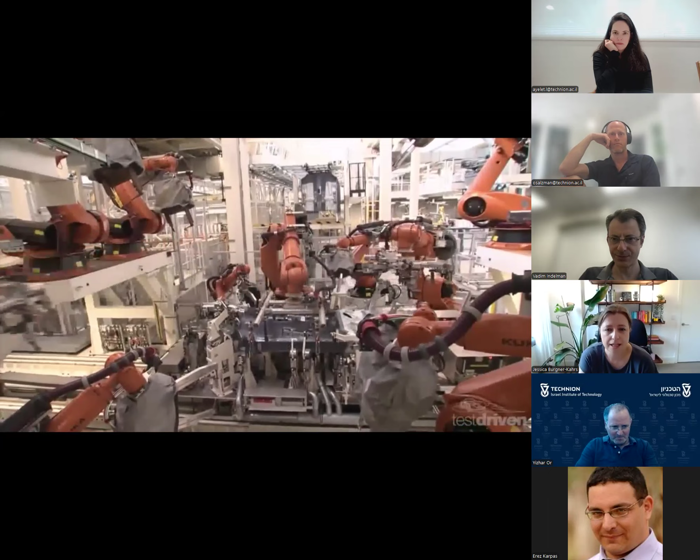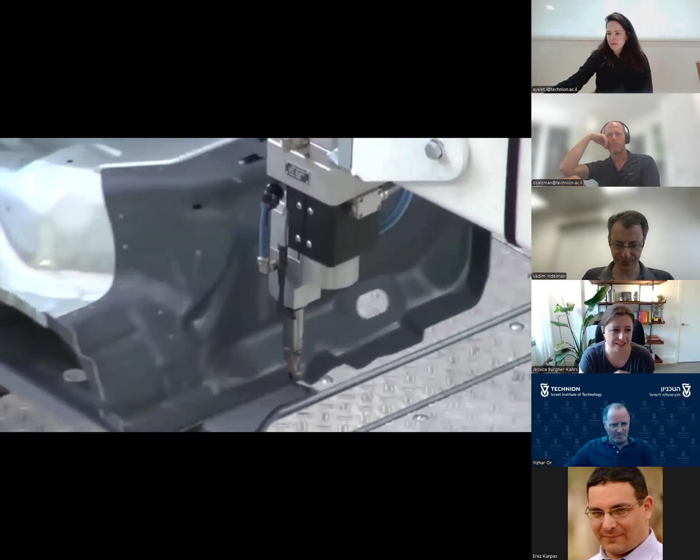Before we start with continuum robots, I want to talk about industrial robot arms, because these are really the workhorses of modern automation. They are positioning themselves with sub-millimeter accuracy. They are repeating thousands and thousands of cycles per hour without any fatigue. So they operate in these highly structured environments. Every bolt, every panel, every welding seam is exactly where it's expected to be. So I'd argue that motion planning and control are largely solved for these type of applications to date, because the world is mostly rigid, it's deterministic, and it's fully known.

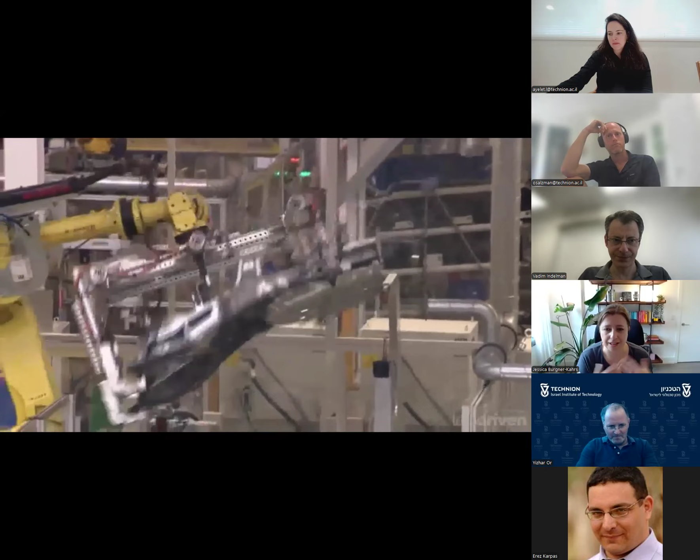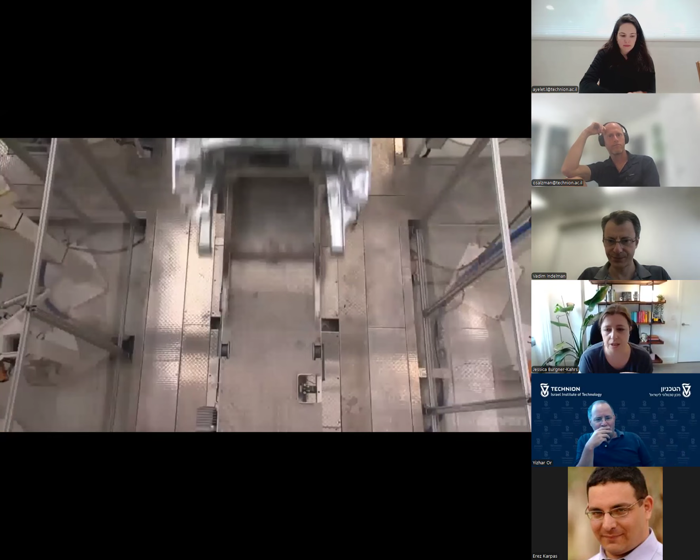At the same time, these robots are usually fully and heavily caged, so there's no uncertainty. Any deviation, any uncertainty, any contact with the unexpected would pretty much cause the whole system to halt. Now, in the past couple decades, we have also seen robots moving closer to humans. There is the counterpart of these traditional serial robot arms that are equipped with much more sensors, force torque sensors in every joint, and they have been termed collaborative robots, so they can do repetitive tasks closer to humans. And I guess nowadays we also see humanoid robots everywhere in tech demos, in news headlines, in investor decks.

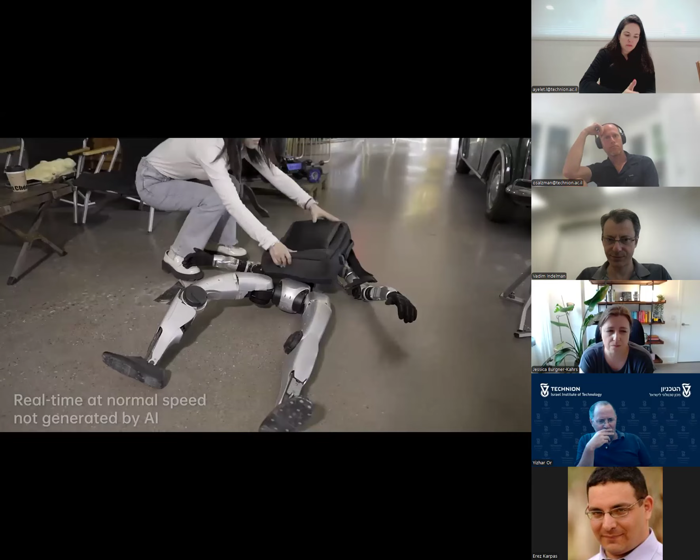There's true excitement and real money going into the idea of building this general purpose robot that can walk into a warehouse or factory, take over manual labor, or if we see these recent Tai Chi competitive motions of the Unitree, it's quite remarkable and an appealing vision to see these robots moving like humans.

A drop-in replacement for human workers is really appealing. They could use tools and spaces as they are with no redesign needed, as opposed to prior generations of industrial robots. But most of what we see today is still tightly scripted, carefully tuned, and far from robust in unconstrained environments. What is often missing is manipulation.

When you see these videos, there's no real true physical interaction with any cluttered, deformable, or delicate objects, which is where most robots struggle. Walking is hard, but touching the world with skill, like grasping, peeling, threading, assembling, is even harder. So despite the humanoid hype, we still don't have robots that can reliably do most of the things we see here.

They cannot operate in unstructured environments very well, and if they do, it needs extensive setup and tuning. These are everyday tasks we take for granted, like peeling an apple, threading a needle, flipping a pancake. Robots can weld cars, do backflips, do Tai Chi, but why can't they button a shirt or get a container from deep within a cupboard?

Each of these tasks requires subtle control of contact, friction, compliance. We require real-time feedback from both vision and touch. And it's not just about the grasping itself, but also about interacting with objects that are deformable, cluttered, fragile, partially occluded.

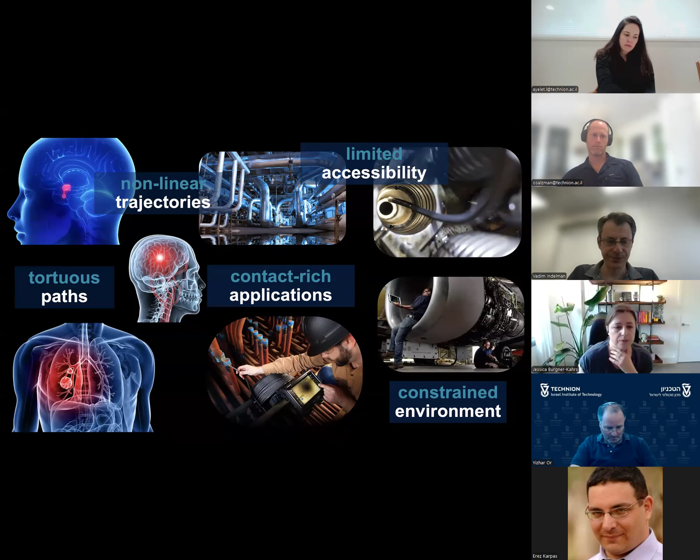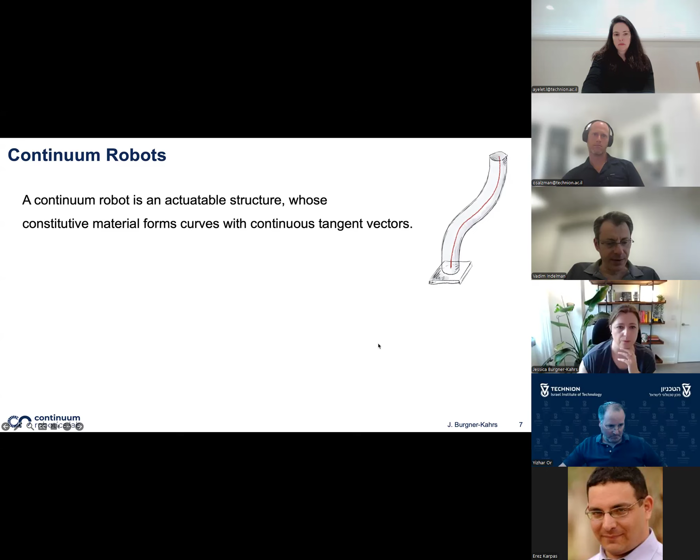So that's the kind of applications we're targeting with Continuum robots. To give a formal definition for those that maybe haven't heard of a Continuum robot before, to differentiate from other robot bodies: a Continuum robot is an actuatable structure whose constitutive material forms curves with continuous tangent vectors in the mathematical description. So usually we have one dimension that is much longer than the other two, which gives it this continuous appearing shape.

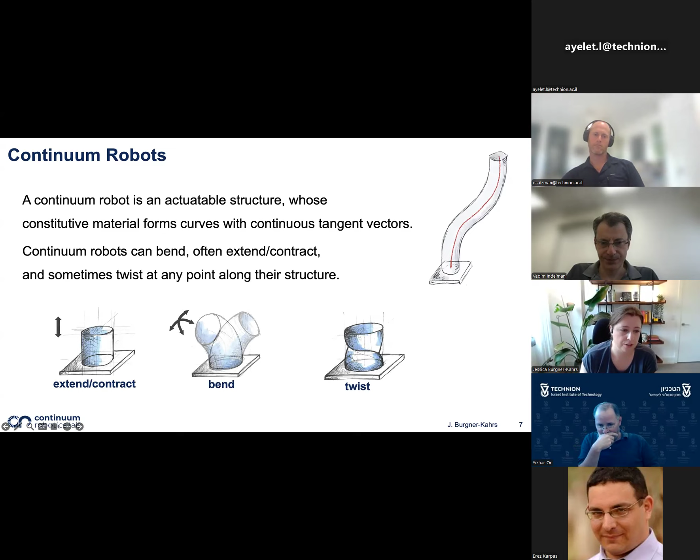Continuum robots can bend, often extend and contract, and sometimes twist along any point along their structure. These are the so-called motion primitives that we try to create in a Continuum robot.

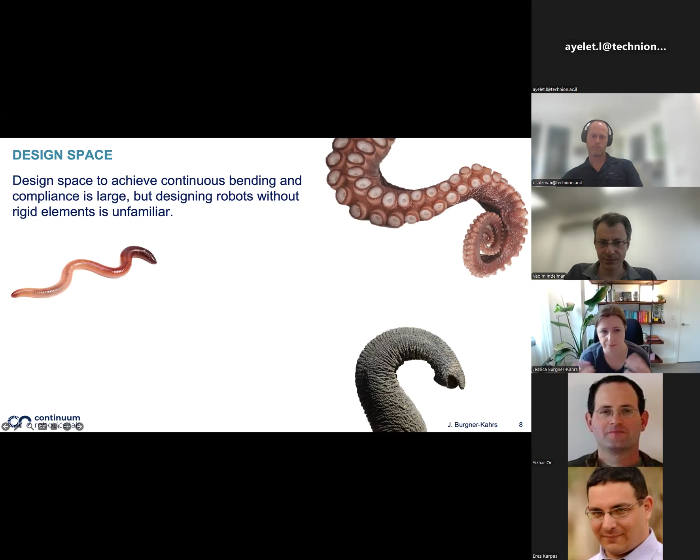Working on Continuum robots is difficult because the design space to achieve this continuous bending and compliance is actually quite large. But at the same time, as mechanical engineers, designing robots with non-rigid elements is still quite unfamiliar—most design tools are made for rigid materials. So we often take inspiration from the animal kingdom to see how these complex tentacles, elephant trunks, or worms operate, in a sense.

Another challenge we're facing is the curse of dimensionality. As I mentioned earlier, Continuum robots have a kind of indefinite ability to move. The standard methods in robotics for kinematics, dynamics, motion planning, perception, and control usually assume discrete joint robot architectures, which make the transferability sometimes questionable. Some methods work, some don't. So there's quite a challenge here.

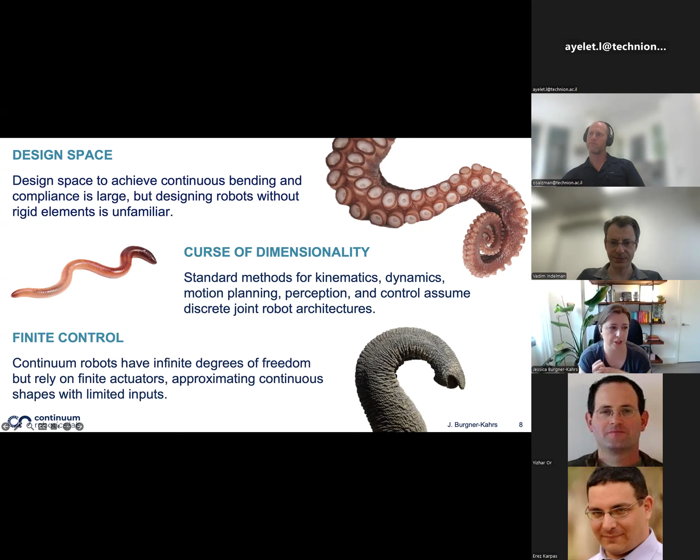And lastly, from a control standpoint, we only have finite control over these bodies. Even though they have theoretically infinite degrees of freedom, we rely on a finite set of actuators. So we need to approximate the continuous shapes with some limited inputs, and that's both challenging from a control perspective, but also from a design perspective.

To get a better idea of what we're doing in the Continuum Robotics Lab, we're doing research on two sides of things. We tackle intelligence in robotics, both from an embodied and from a computational standpoint. On one side, we explore physical intelligence by designing soft and continuum robot bodies that can passively adapt, exploit contact, interact safely and effectively with the environment. As those designs are typically compliant, they also encode some sort of intelligence in their morphology and material behavior.

On the other side, as a computer scientist myself, we also tackle computational intelligence. We develop algorithms for state estimation, motion planning, and control that allow us to predict, sense, and eventually act under uncertainty. It is really this intersection of these two domains, embodiment and computation, that I believe will make the next generation of intelligent continuum robots emerge.

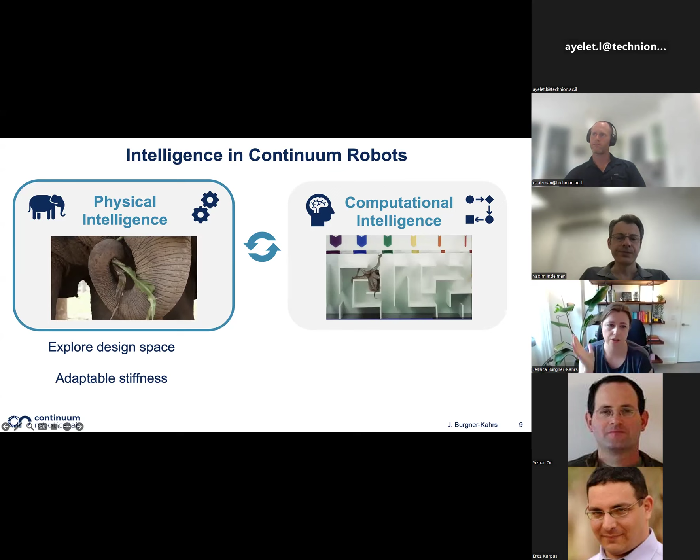In the talk today, I'm going to talk to both sides. I'll start us off with physical intelligence, talking about how we explore the design space, look at different robot embodiments, and how we can achieve adaptable stiffness and motion capabilities. Then in the second half of the talk, I'm going to address the computational intelligence side of things.

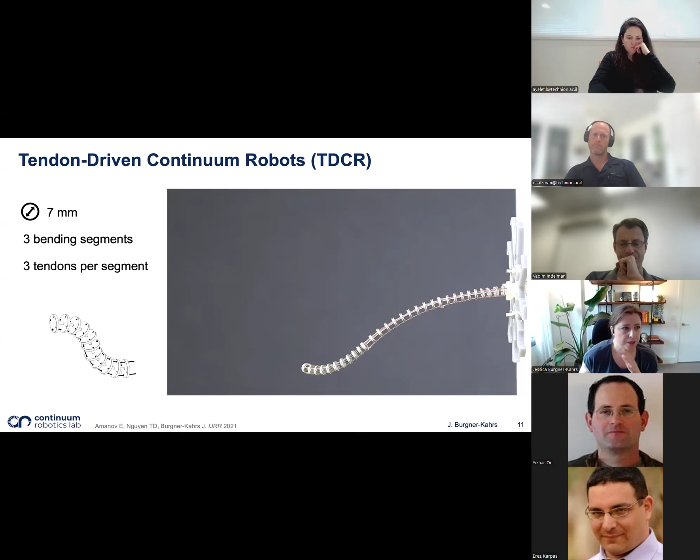More recently, Jimmy here, a PhD student in his 3rd year currently in my lab, has been building an adaptation of a tendon-driven continuum robot using these thicker routing discs and universal joints. With that, he's built this system that can integrate nicely with a collaborative robot, so you can use a regular style robot to position the continuum robot, and then the continuum robot can move into a cluttered environment or workspace. Here he's showcasing teleoperation of both robots.

One thing we often try to hide, but explicitly don't do here, is that our continuum robots are typically very small, but the actuation portion is still considerably bigger. That's something many videos don't necessarily showcase. It's something that needs to be worked on to miniaturize these actuation units. But at the same time, they usually stay outside of cluttered environments, so it's not that big of a deal.

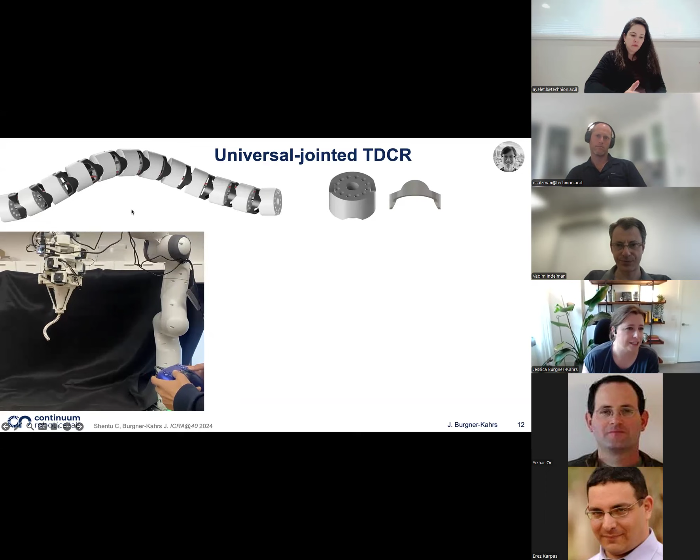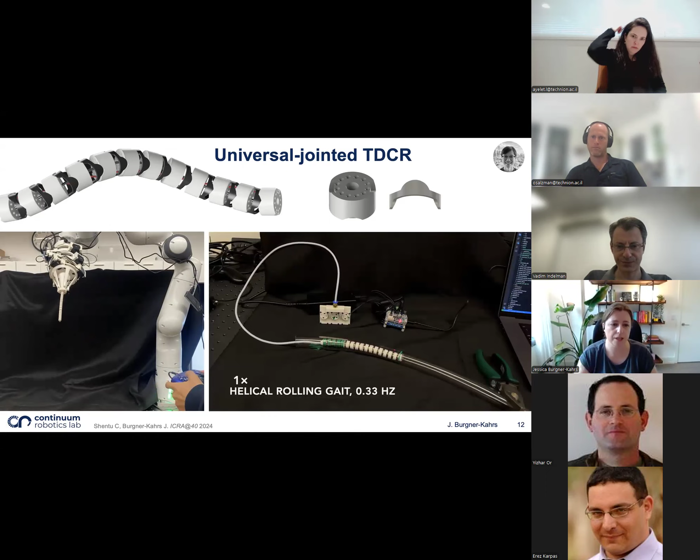You might wonder why I'm showing this universal jointed tendon-driven continuum robot - it's because with this robot we can also showcase physical intelligence. This is a single segment with a very special type of tendon routing: helical routing. Using just 3 actuators down here - 3 servo motors - we can induce a helical rolling gait, and this robot is able to crawl up this tube by pure morphology. It's pretty much helically screwing its way through this pipe. This is sped up 20 times, so it's actually really slow in reality, but you could think of inspection being possible this way.

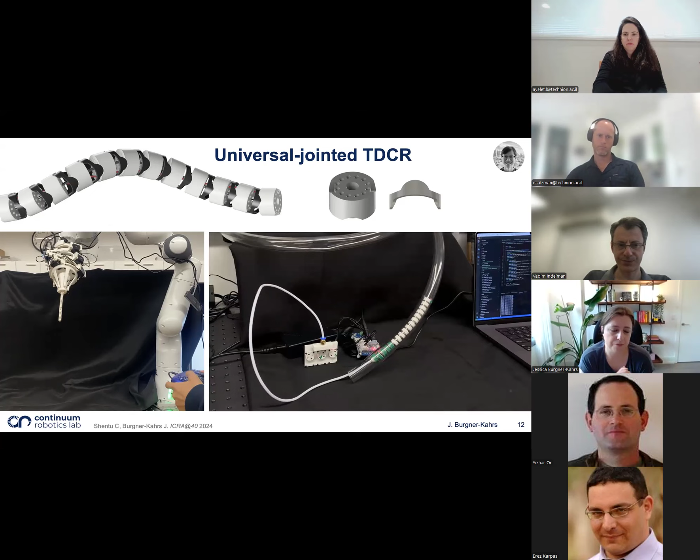We can also slant the tube, so it can move upward too. Thinking back to the chemical piping industry, we may be able to use a robot with just this physical intelligence in its morphology to do some inspection tasks without much compute. So we can pretty much offload this into the body.

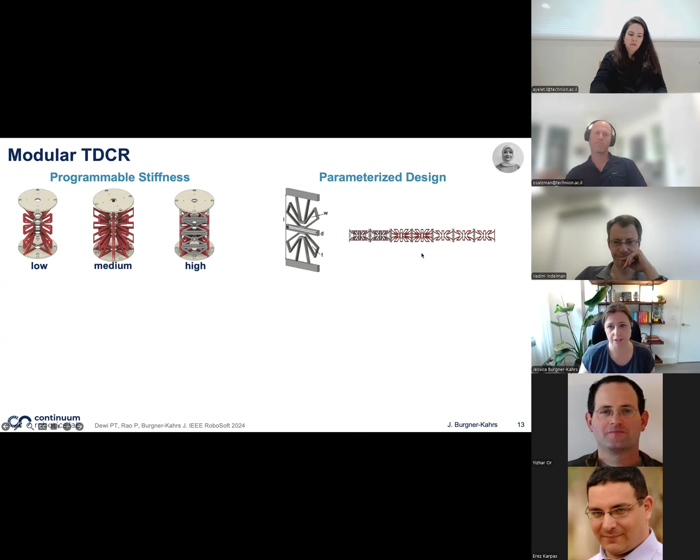Another thing I wanted to showcase today is work by Puspita Dewi - she's up here, she just finished her master's and is now a robotics engineer in my lab. She designed these modular units, which is quite exciting, to compose a tendon-driven continuum robot. She looked at different pre-programmable stiffness modules - low, medium, and high stiffness - and parameterized the design such that given application requirements, like how far we need to reach in an environment, the type of curvatures or bending motions needed, and the stiffness required for this length of robot to withstand gravity and hold its own weight, she can come up with a composition of these modules. Since we can rapid prototype them quickly in various sizes and forms, it allows us to quickly assemble custom continuum robots for a variety of tasks.

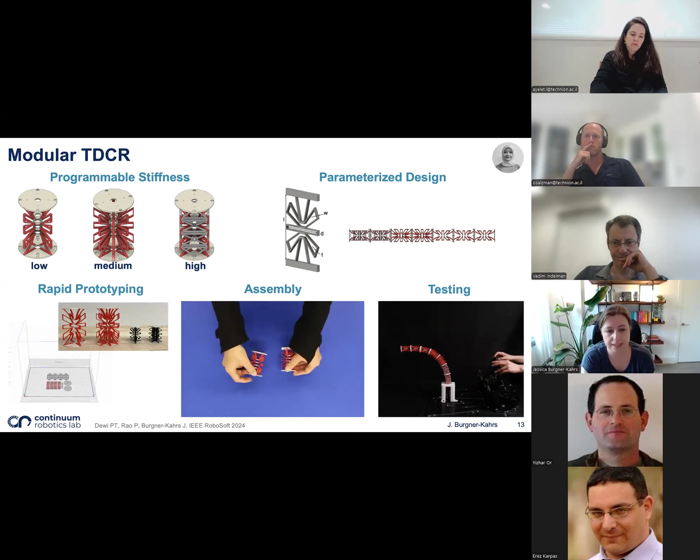Here we see the assembly process - it's quick and easy. Then we would test the robot. This is a manual testing setup, so there's no robotization here - just two manual input devices, which are essentially pulling and releasing tendons in this system.

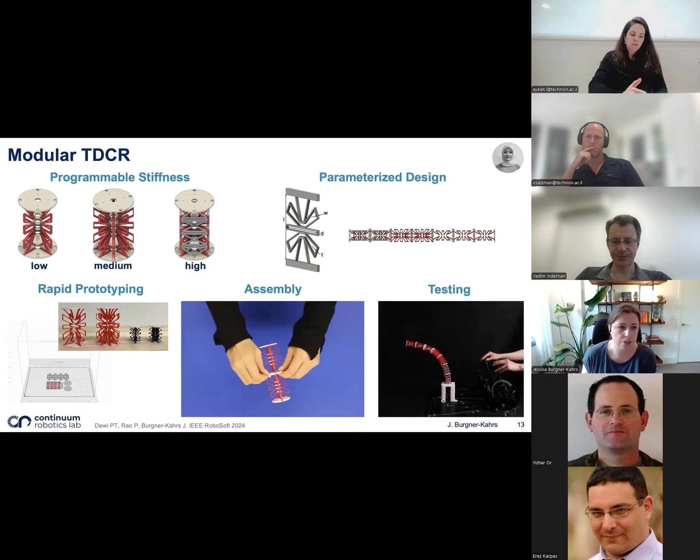So this is work we presented last year at RoboSoft. And then this year, Puspita took this further and created a prototype that can be used for aircraft wing inspection in a mock setup. This is a scaled down version of a Cessna aircraft wing.

Usually the inside, which holds the kerosene, needs to be inspected visually. So all these different areas that we marked here with this pattern need to be inspected visually to make sure there's no cracks, nothing faulty.

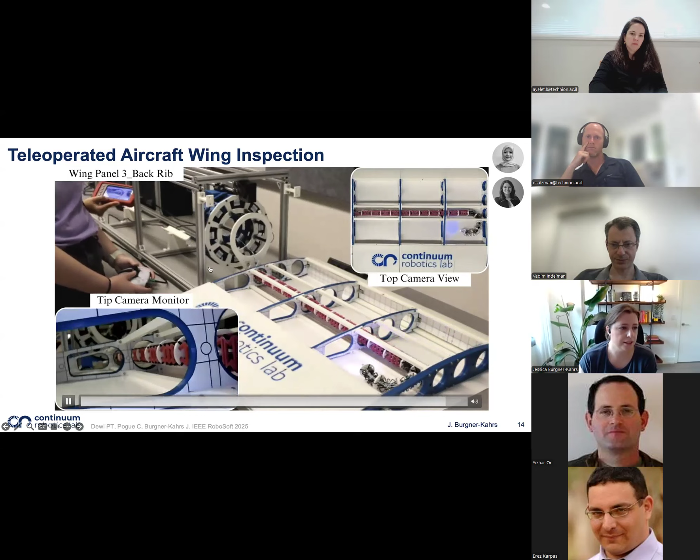And so the robot was designed based on the requirements of this task, the different bending angles and the depth the robot has to reach. And then she built the system, and it is manually operated by a user using teleoperation, regular joint space and task space controllers. And then the operator is using this tip camera monitor, watching out of the tip of the robot as they're navigating through the environment.

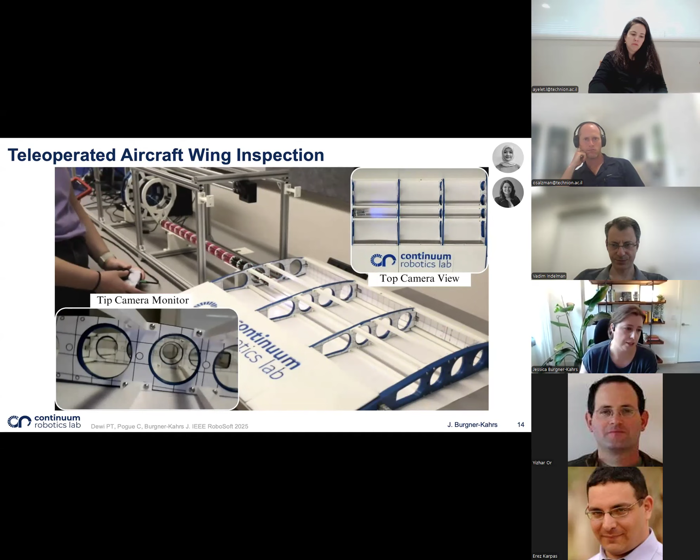And then there's a bunch of other things we can do in order to achieve physical intelligence. We can build sheaths that can adapt the stiffness of the robot. We can build them very lightweight from origami style patterns. We can join continuum robots together eventually to give them higher payloads, because that's one of the downsides of having a lightweight compliant structure, that the payload and ability to exert forces on the environment is theoretically limited.

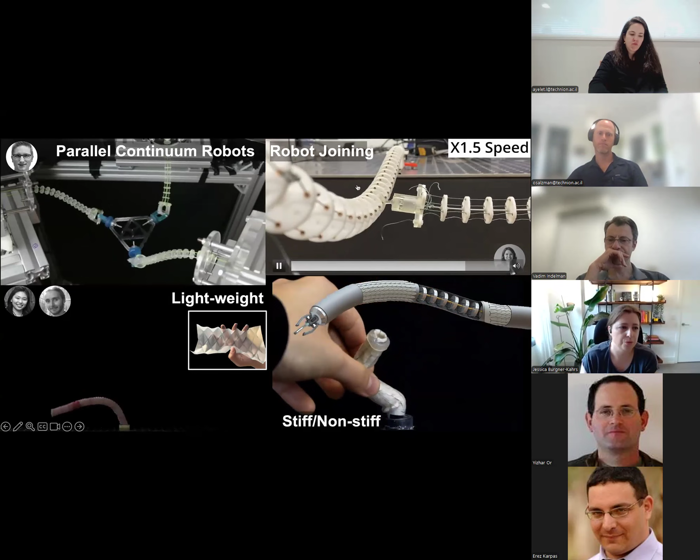So we need to be quite smart about how we operate these robots. So one idea is to have them join together to become stronger as they are within a cluttered environment, or use them in parallel.

All right, that gives you an idea about the physical intelligence side of things and how we can build robots. In the next, I guess, 20, 25 minutes, I want to talk about the computational side of things, because that is, now that we can build robots that can operate in a way we like, an even harder problem, I would argue.

At this point in time, I feel like it's easier to build a continuum robot than to control it properly. I'm going to talk about state estimation mostly, and then also talk about some of the joint work we did with Oren on environment interaction strategies.

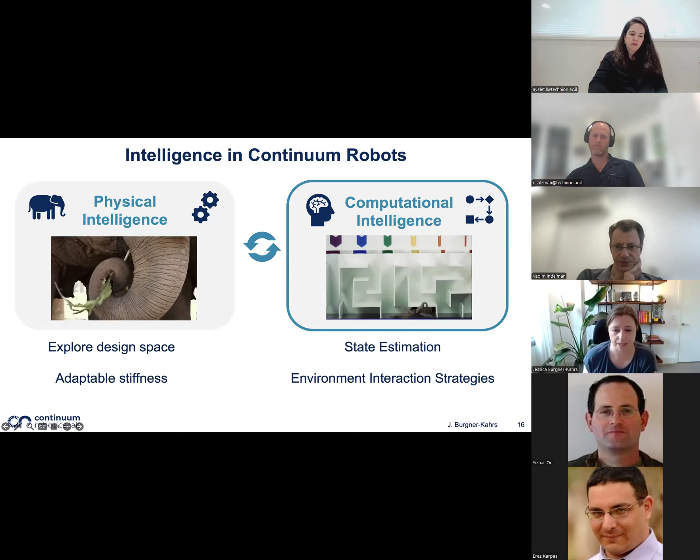So a continuum robot is great. By now, you have seen a couple of them moving around, and this is an easy thing to do. But when you look at it from a computational standpoint, you would like to obviously understand, what does my input cause of a shape, and how is this shape influenced by external forces and stuff.

And we would eventually want to know the shape under any circumstances, any external loads, internal loads, external interactions with the environment, gravity, so on and so forth, depending on material properties and so on. So that becomes a pretty challenging problem, because we cannot just use conventional robot kinematics and dynamics formulations.

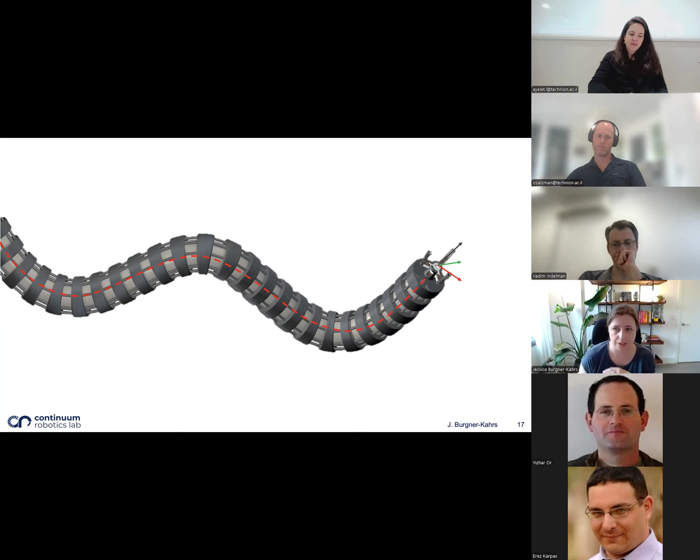And the first question that you have to ask yourself is, well, how can we represent the state of a continuum robot? And so deciding for a state representation, meaning that backbone curve parameterization, there's multiple ways we could go about it. A very common one is approximating the shape with lumped parameters.

Usually we use constant curvatures. That's the simplest way to describe the shape, in that you approximate it as a series of tangential constant curvature arcs, and each arc is then characterized by its curvature kappa, the bending plane phi, and the length of the arc.

Another possibility to be a bit more descriptive, if the robot is also subject to external loads, the shapes may not be constant curvature. We move to modal functions. We have seen that Euler curves are a very great representation because you have that change in curvature, which is much more reflective of contact. Or you use some other sort of modal function, polynomials, you name it. Many of those have been investigated for continuum robots.

But ultimately, and in the ideal case, you would really like a variable curvature or distributed state representation where you parameterize the whole robot by its arc length s, from the base all the way to the tip. And then you use the strains, the bending strains, as well as the shear and elongation.

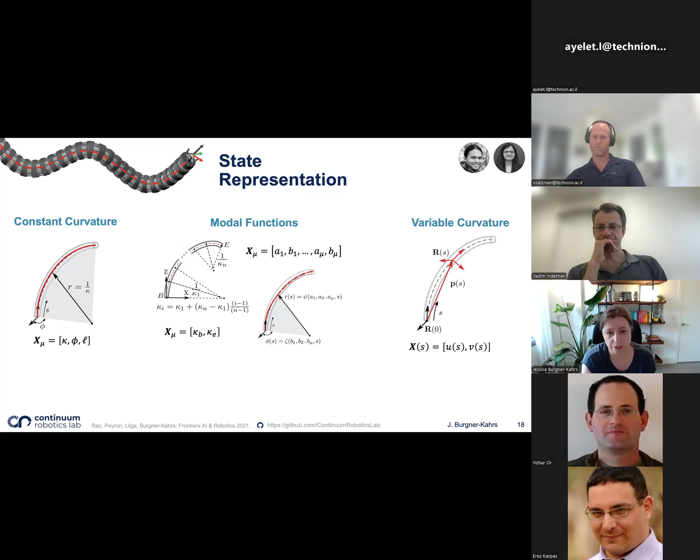But as computer scientists, you can probably already appreciate you have efficient to compute, low parameter representations on the left. And on the other hand, you have these high model fidelity, almost infinite number of parameters on the right-hand side, which pretty much put us at a trade-off. On the one hand, we are less robust to unmodeled effects like gravity, external forces, but pretty efficient to compute. And on the other side, we have this high fidelity, but also high requirements in terms of sensing to move these models into the real world.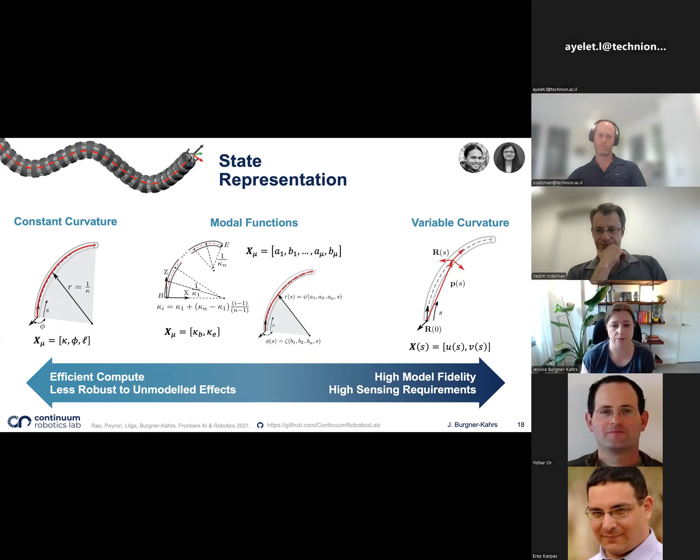So using a state representation that we picked, we can then go into a forward modeling, meaning input is the tendon tension or tendon displacement on the back end, eventually knowledge about external forces. And then we can take a pure physics-based first principles approach, use a piecewise constant curvature framework, which relies on this modal functions, some limited state representation to compute the shape.

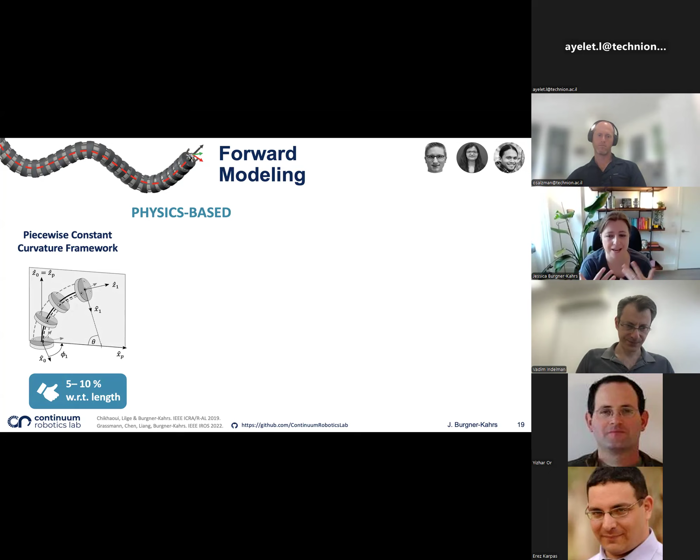And as a rule of thumb, the accuracy we can achieve, if it's well calibrated, is 5 to 10% with respect to the robot length. That's usually how we express error here. The state-of-the-art model uses

mechanics. So we are actually using elasticity theory and representations of beams from mechanical engineering, like Cosserat rod models, to derive kinetostatic models, meaning to fully understand and describe internal moments and forces as well as external loads among the whole body with all the material properties as the robot experiences elastic strains, usually Hooke's law, in order to determine how developed stress is directly proportional to the strain the robot experiences.

And then with this high level of complexity, we can actually achieve quite high accuracies if it's well calibrated and the system is identified well. We can get down to this 1.5 to 3% with respect to length. Meaning, if you have the 30 centimeter long robot, you get an error just model based about 4.5 millimeters at the tip without sensing. So that's quite fair, quite remarkable. Obviously not in the same ballpark as with industrial robot, where you usually go into sub-millimeter accuracy.

We've also taken on a learning-based approach, looking at how a vanilla feed-forward neural network will perform. Often our issue is data. In continuum robotics, most labs have their own prototypes. There's no standardization. So if we collect a data set, it's valid for our robot, but it's not really transferable. It's one of the challenges we face in continuum robotics.

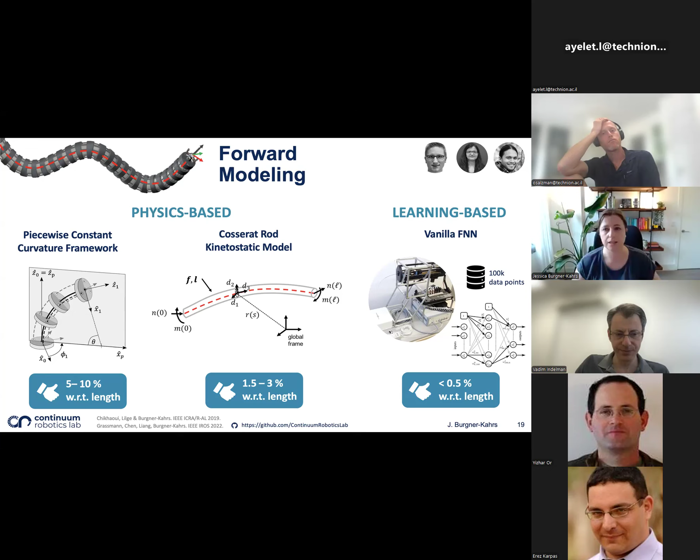Using this forward model, we can already do quite a bit. We can invert the model using finite differences and then go into a pretty much standard teleoperation control scheme where the input by the leader is some desired velocity at the end effector or at the tip, and then we can use a model-based controller to servo the robot to that desired velocity, and then we can pretty much close the loop without any actual sensors, but just by the human eyesight and human judgment.

And so we have also applied some model predictive controllers to keep the robot within a confined environment. Like here, it would automatically not get out of this allowed region, which makes teleoperation for these robots relatively intuitive.

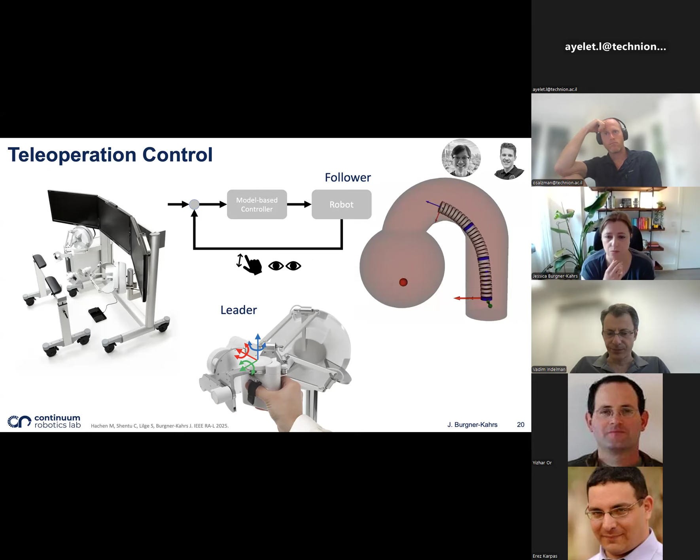And we have seen great success with this teleoperation scheme as the continuum robotics community emerged, that there are many commercial medical continuum robots to date that are pretty much using this model-based design teleoperation in order to make meaningful contributions to patient care. We have these catheter steering robots where you have multiple catheters that are nested inside each other and then controlled from outside the room to prevent radiation exposure for the physician.

We see robot bronchoscopy systems, for example, treating the bronchi I mentioned earlier, doing biopsy of suspicious tissues. We also see single port systems that use continuous curve instruments to gain better triangulation in space within a confined surgical environment.

And there's also some recent work for prostate surgery, where you go through the natural orifice and, using these small continuum robot tools, can do laser resection of benign prostate conditions.

So this is great, you could argue continuum robots have found their way into medicine. This is a big portion of the work we've been doing over the past decade, pretty much since I moved to Toronto. We've been diverging a bit because I believe in medical continuum robots there's not that much needed in terms of design, and maybe also not the need for so much autonomy.

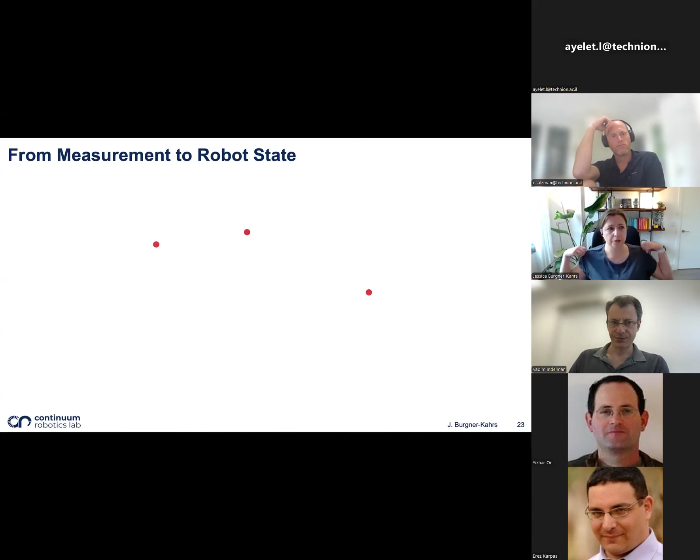The biggest challenge we've faced here is thinking about measurement. Let's assume we measure these three points in space - what is the actual robot state from this very limited observation? Your model will probably tell you the robot is somewhere here, and maybe there's some information on your side, but then what is the actual robot shape and state at any point in time?

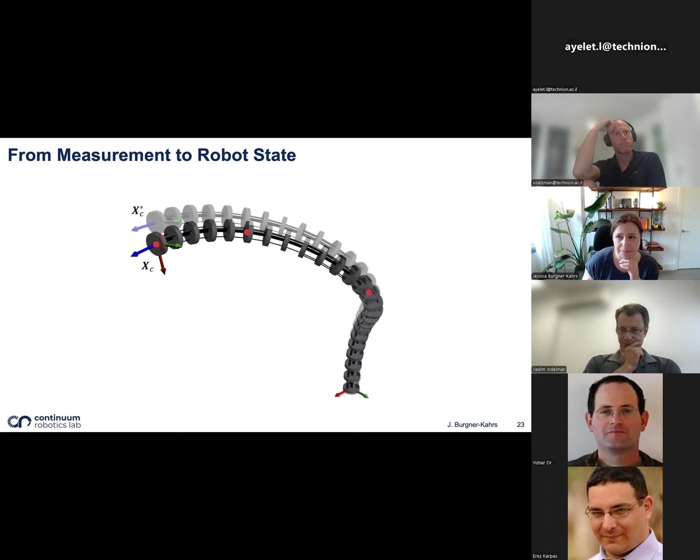In this dilemma of measuring robot state, you can obviously use discrete measurements and do some regression to try to find a shape that fits. Many have been doing this, but what's been really remarkable is a collaboration we have with Tim Barfoot here at University of Toronto.

What Tim found when he heard one of my talks is that there's an analogy between the continuous trajectory of a mobile robot and the continuous shape of a continuum robot. That's an exciting revelation we had.

On one hand we have a continuous trajectory - imagine this mobile robot moving with respect to time. Its state is usually its pose, a homogeneous transformation matrix. Then you have the generalized velocity, usually expressed as a twist in the Lie algebra. The differential kinematics is the time derivative governed by the twist using the exponential map in the Lie group.

On the continuum robot side, things are actually quite comparable or analogous. Here, recognize the shape is not expressed with respect to time yet, but only with respect to arc length - from base to tip, similar to time, just with arc length s. So here we have the position and orientation at any point along the robot as well.

But here we don't have the generalized velocity, we have the generalized strain vector, which is the spatial analog of generalized velocity, but for spatial deformation. Rather than temporal evolution, we're describing pose changes along space, meaning bending, twisting, shear, elongation. The kinematics is expressed as the derivative with respect to arc length, using the generalized strain vector and its exponential map, so we can determine the kinematics.

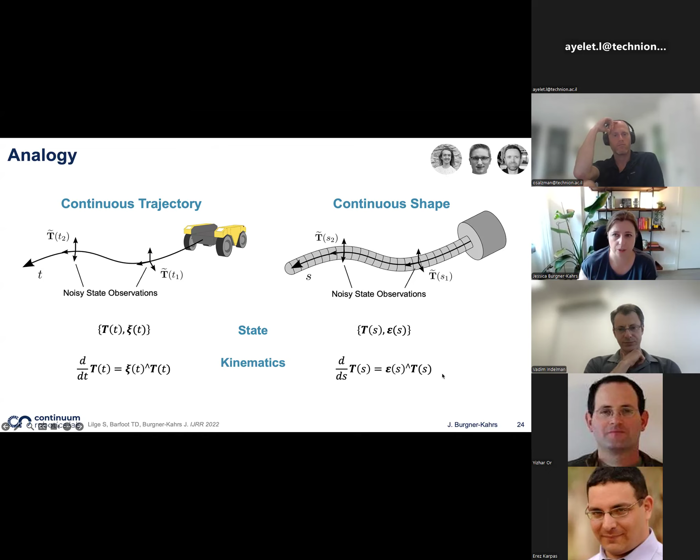I want to tell you a little bit about what we did here. We use Gaussian process regression to estimate the state, meaning we create a prior distribution, a zero mean Gaussian process on the strain derivative with respect to the robot arc length, meaning the internal material stresses.

And this prior makes no assumptions about forces acting on this continuous body and favors configurations with minimum internal stress, which is also what a physics or mechanics-based model would do, energy minimization. So we usually assume that we know some strain boundary conditions.

Here I'm just showing you the prior mean and some random samples for this Gaussian zero mean prior. It's zero mean, and here we have the power spectral density matrix, which is the continuous version of a covariance matrix. In our case it's usually diagonal, and can be used to make the prior more or less restrictive in certain degrees of freedom. So it's conceptually tuning the robot's compliance.

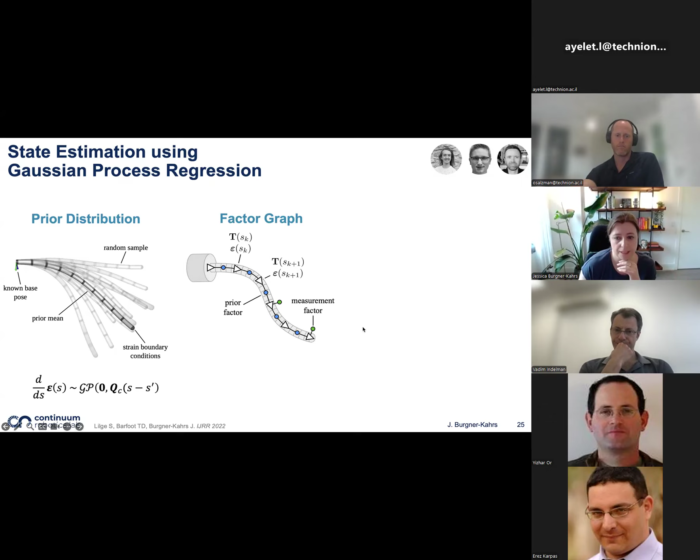Then we formulate this as a factor graph. We have prior factors and measurement factors. We define squared error terms, or cost, to evaluate how close the continuum robot state is to the prior assumptions. Then we assume we have some noisy measurements which relate discrete states, also expressed as measurement error terms in this formulation. Finally, we can determine the most likely continuum robot state and its posterior distribution given both the prior and measurement factors, with the respective error terms traded off against one another. This is formulated as a batch optimization problem which seeks to minimize the overall cost and maximize the likelihood of the posterior across all discrete states. This procedure is maximum a posteriori estimation.

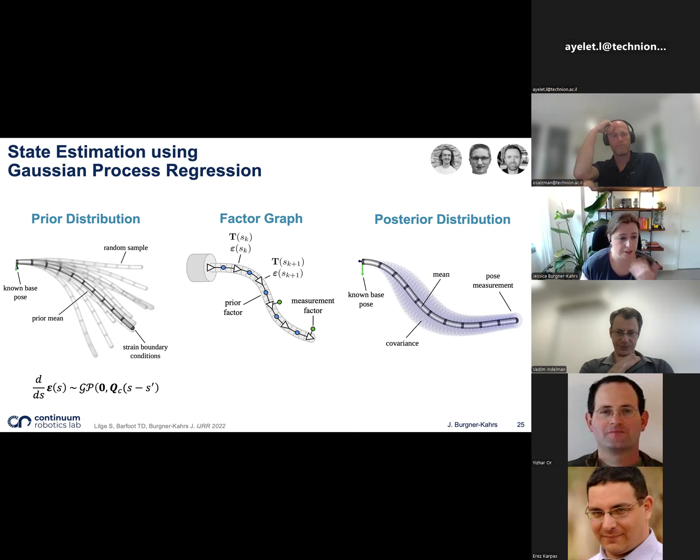So the posterior distribution gives us the mean robot shape and also the covariance at any point in time. And since it's a batch process, we can also interpolate between the discrete states. This works remarkably well - it's pretty much repurposing what Tim's lab developed for mobile robots.

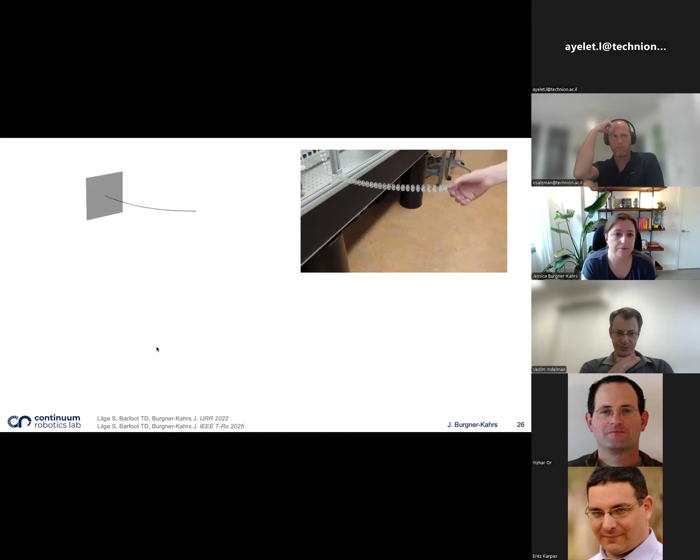And here we see an example. So here we have the actual robot, and on the left-hand side we have the state estimation, using pose measurements - 3 pose measurements. You can tell that there's quite some agreement in the state estimation. We evaluated the error in simulation and found it to be about 1% with respect to length, which is quite good.

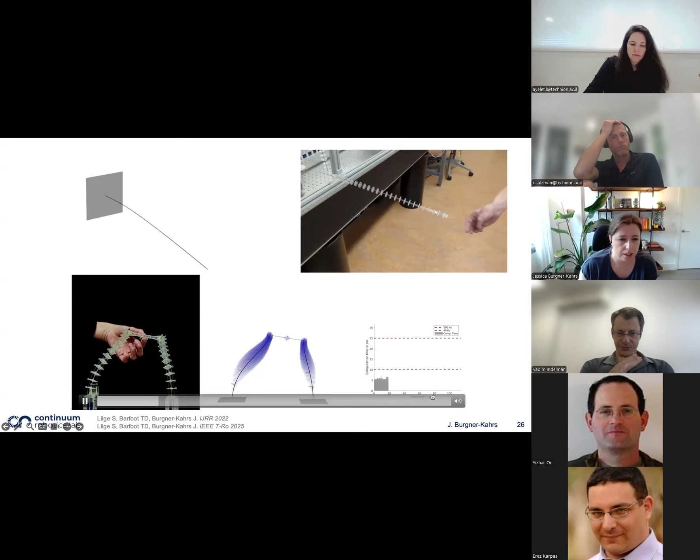Sven was also able to extend this to multi-continuum robot systems. Here we see 2 coupled continuum robots where we only take one measurement at this joint location in the center - so one position measurement. And then we see the state estimation performing on this measurement. On the right-hand side you get an idea about the computation time.

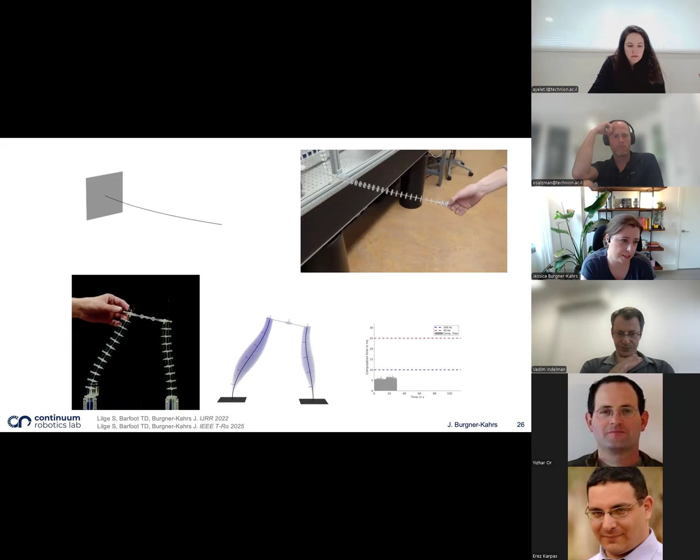So most of the time we stay below the 10 millisecond domain, but as the video progresses you'll see that at some portions we are peaking up. But in general we can stay above 100 hertz most of the time. Sometimes there are these little peaks which are a little slower. These are all quasi-static - we don't make use of previous states yet.

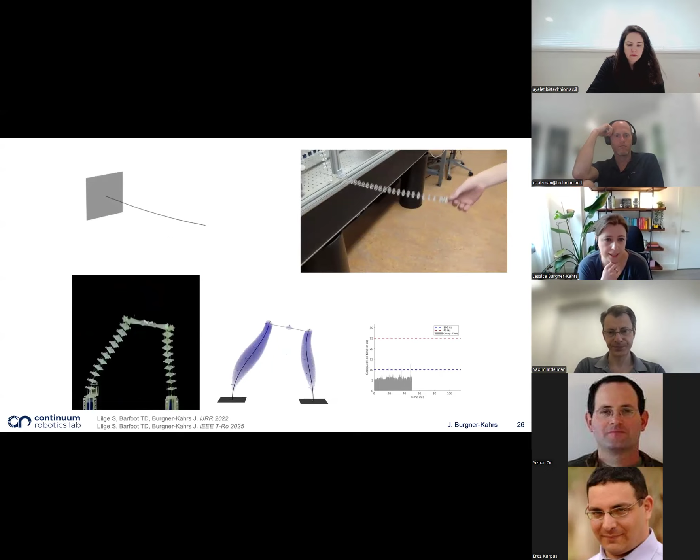This is work that is now continuing now that Sven finished his work. Spencer is moving on to space-time continuous state estimation - not only quasi-static, estimating the state from one measurement, but truly looking at the temporal evolution as well. So here are some early results he got recently. This is the simulated robot that he's basing his study on.

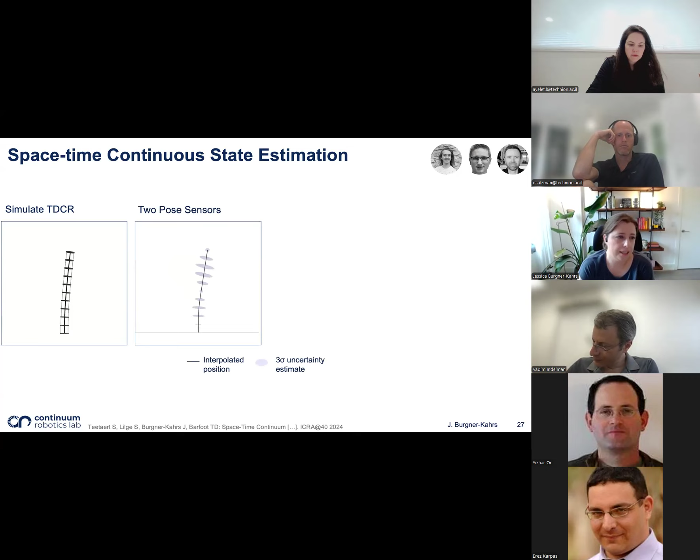And then he can determine the continuous space-time shape using, for example, here it's two pose sensors. You see the uncertainty at the location of the sensors is, as expected, low - there's one sensor in the middle and one sensor at the tip. And in between, we interpolate between these discrete states.

I'm excited about this work. It's not a major publication yet, but I figured I'd show you these early results to make a point: I think we're very close to being able to do state estimation in a way that's ready for use in actual applications for autonomous navigation in cluttered environments.

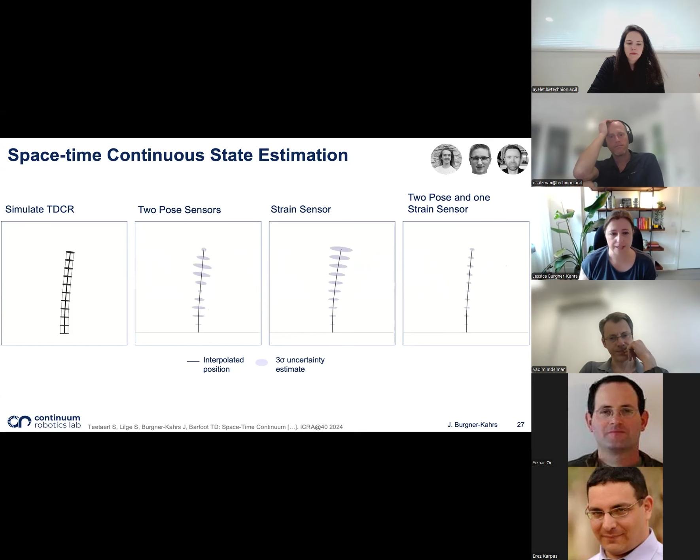All right, so state estimation is a work in progress, going pretty well. Another aspect we're tackling, work we did with Oren, is that in the majority of robotics, we have pretty much always tried to avoid obstacles. Any rigid robot motion planning scheme pretty much looks at: do not make contact with the environment, giving some guarantees on not actually touching an obstacle. And that has been for the longest time the paradigm.

But this doesn't really make sense because we seek to empower robots to embrace contact. So even though there is a huge push in robot manipulation to make this contact, there's also, and even more importantly so, in soft and continuum robotics. Often we point out that continuum robots are compliant, safe to interact, but it's interesting that most of the literature uses continuum robots in free space, not tackling the challenge of contact, or not leveraging contact at all, trying to do it in an obstacle avoidance scheme.

With this problem, I was making a call to the community that Oren was responding to, and that kicked off our collaboration. I'm really proud that we are, I think, the first to tackle this motion planning paradigm shift, leveraging contact with the environment to gain additional motion capabilities in continuum robots. This contact-aided navigation work was mostly done by Priyanka Rao. She finished her PhD last year and was greatly helped with supervision by Oren. We have this great publication that she just recently showed at ICRA. I want to give you a little idea about the challenge, talking only briefly so we have time for questions later.

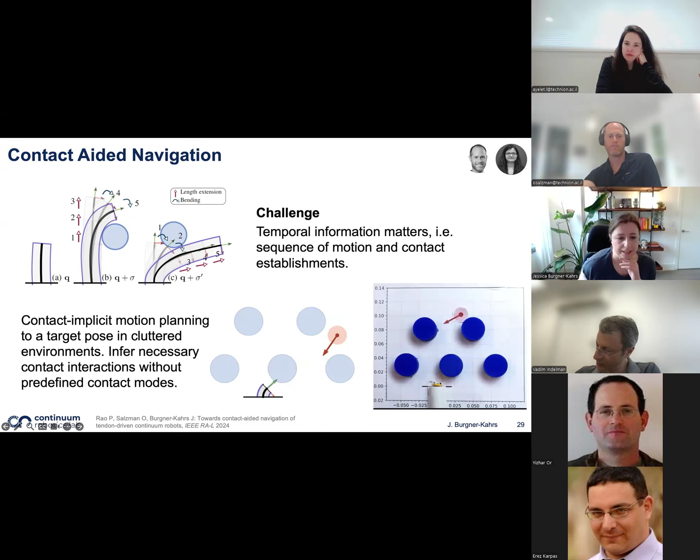Before we wrap up, I'd like to mention the Open Continuum Robotics project that Oren was mentioning. For students listening to the talks, or maybe even some PIs here, if you're excited about continuum robots or feel like you want to know more, that has actually become a bit easier, I hope, because there is quite an entry barrier if you want to get into continuum robots. You cannot buy continuum robots off the shelf. There is no textbook, and limited material is available online.

If you have a student who wants to get started, they usually have to read hundreds of papers to get an idea of where the community sits. That led us to create the Open Continuum Robotics project, opencontinuumrobotics.com, to lower this entry barrier and to mobilize continuum robotics knowledge.

So I have been leveraging continuum robotics course material that I created, and pretty much discarded my idea of writing a book, and decided to create this blog to have experts from the community and myself contribute entry-level material for educated roboticists wanting to know more about continuum robots, but also for continuum robotics graduate students, postdocs, researchers that want to keep up to date with research advancements. We also provide some of the first data sets in the field. We've developed software tools and are also providing hardware, CAD files, assembly instructions, and bill of materials to empower non-mechanical design prone labs to also build their own robot, hopefully. This became a hub for the community, and I've been really happy to have Oren contribute and write about motion planning. It's been really well perceived, and it's generally quite a good effort.

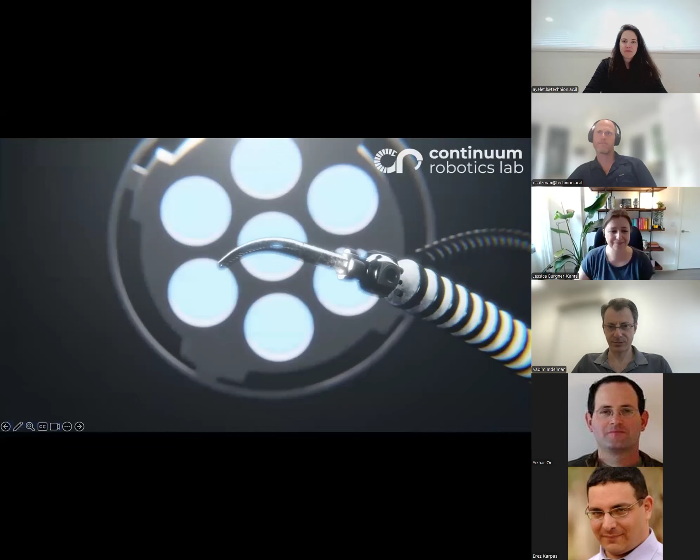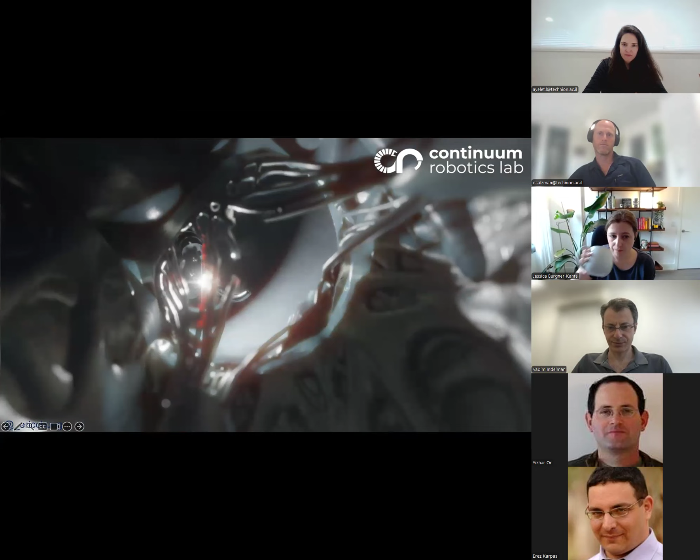This is the vision for continuum robots moving forward: robots being in the human body, entering through natural orifices, eventually doing very delicate surgeries, and then leaving the human and also being useful in all sorts of other applications.

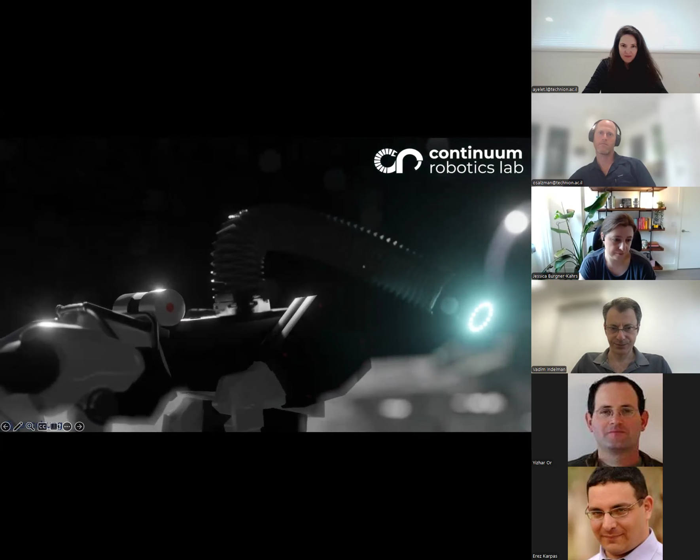Thank you for this very inspiring talk. I have a bunch of questions, but since we know each other, I'm going to hold back and let other people ask. So the stage is open, and if not, then I'll bombard you.

How do you choose an optimum distance between disks and the ratio of disk diameter to distance between disk centers? A very good question. It depends on the task, on the amount of forces we'd like to exert. Obviously, the smaller the distance, the less bending moment you can apply, so that limits the motion ability. It's pretty much a trade-off of what you want to achieve. The diameter, like the 7 mm I showed in the beginning, is pretty much on the smaller side of things, 6 mm eventually, but that's at the low end. On the upper scale, it's mostly about how heavy the body is going to get. You've seen some of the larger scale examples for inspecting jet engines or aircraft wings. We have larger diameter there, but we also use mostly 3D printed, very lightweight material so that the body itself doesn't become too heavy, because withstanding their own weight, withstanding gravity, becomes an issue the longer the robot gets. So it's a real trade-off that we have to make, and there's no recipe, I fear, yet.